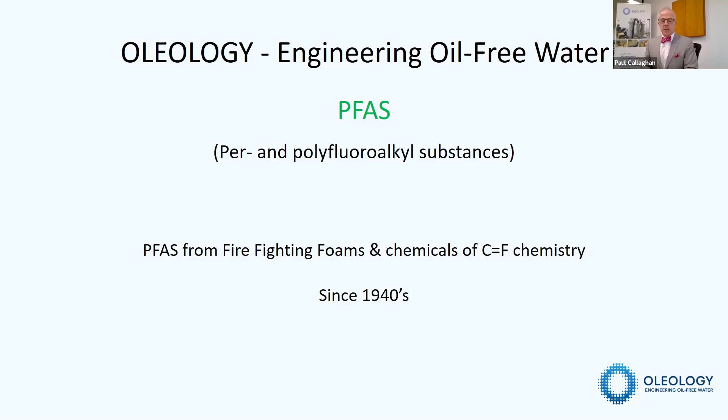Now, PFAS is per- and polyfluoroalkyl substances. Most people know PFAS as a result of reports regarding firefighting foams and the chemicals associated with them. And they're known for their particular chemistry, which has a double bond between the carbon and fluorine atoms. It's made its way into water, and we need to talk about that, the impacts on human life and the environment, but also how we overcome it.

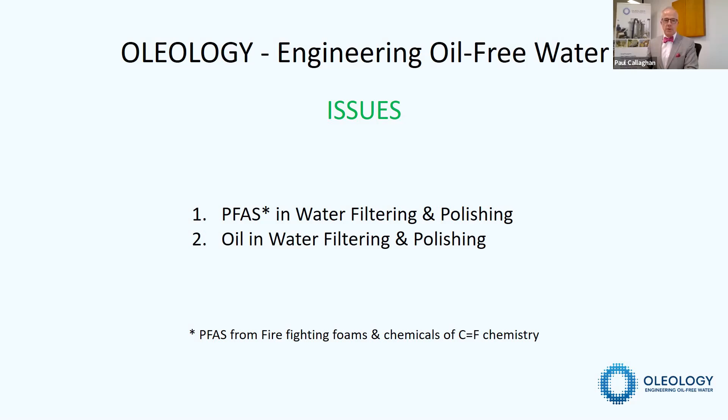And while we're talking about PFAS, it's not possible to consider how to treat PFAS if you don't also consider the oil in water and the ability to remove the oil in the water, the organics that are often associated with PFAS. It's not found in nature, it's purely man-made. It has serious health implications. It's linked to several cancers. Very disturbingly, it's an endocrine disruptor.

So that has an impact on humankind, but it also has a big impact on fish spawning and the fingerlings, basically the reproductive system, both in humans and in animals in nature. It's absorbed by ingestion, and the impact of the forever chemical, as it's termed, is in the order of 40 to 90 years. So roughly 2 to 4 generations before its half-life has been reached. Others break down and oxidize very quickly by comparison.

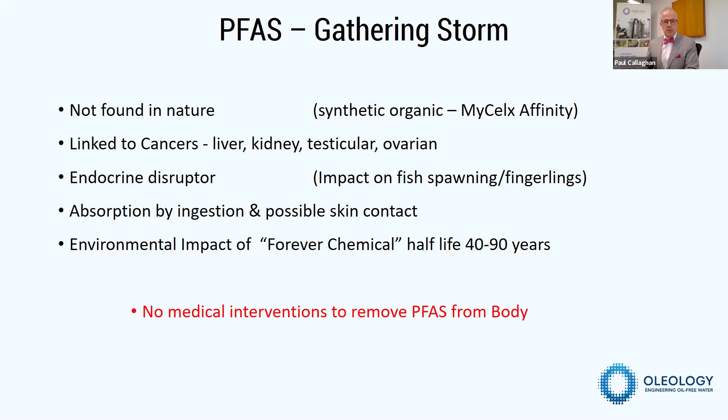Not only does it have a very long half-life in nature, in the environment and in our bodies, but there are no medical interventions able to remove PFAS from our bodies once it's been absorbed. The best and the only intervention is to stop the exposure. And that's what we're here to talk about today.

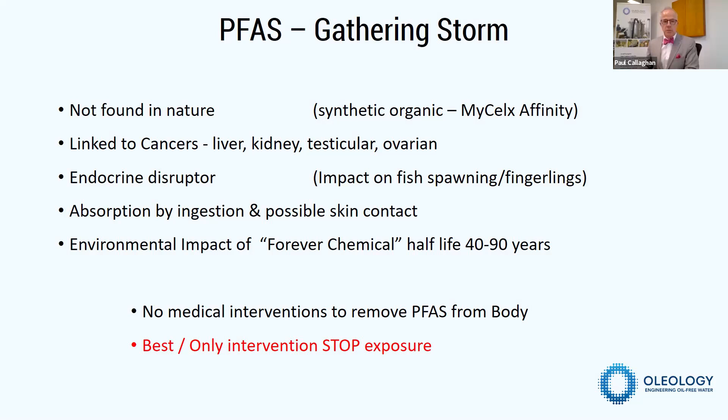In the oil and gas industry, mining, waste, rubbish and landfills, it's listed on the Stockholm Convention. Many of the countries from which you would be listening to this presentation will be a party to the Stockholm Convention, aimed at reducing environmental disruption as a result of contaminants. In Australia, it's part of the National Environmental Management Plan 2. In the US, there's legislation in 6 states that will be enacted in the middle of this year coming, that's 2021.

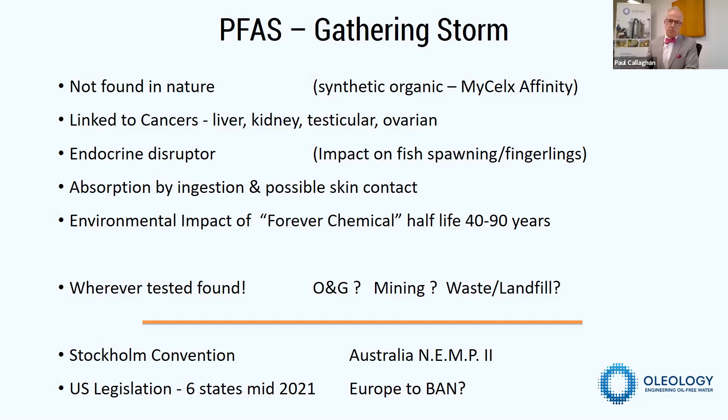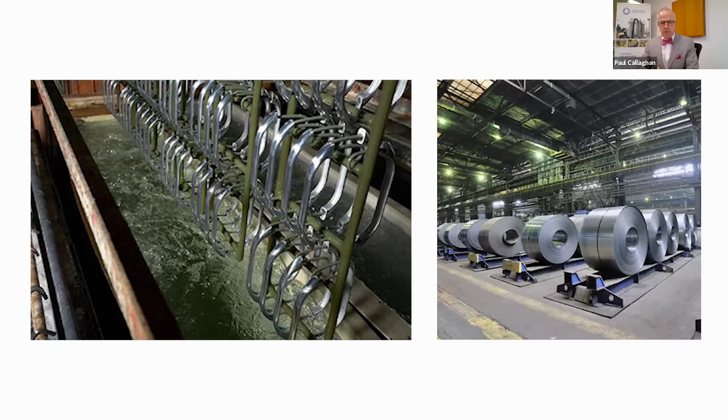And in European areas, they're looking to enact a complete ban on PFAS products, which is quite difficult because PFAS is found throughout a range of industrial applications and also very simple uses, such as cardboard linings and paper bags. It's used in waterproofing and stain guard protection. It's an active ingredient in pesticides. It's part of the process for manufacturing printed circuit boards and metal plating, and firefighting foams are prevalent and still in use around the world in many locations.

All of that finds its way down into the wastewater treatment plants, in industry, through the sewer system, into the wastewater treatment plants, which ultimately discharge into the river and to the ocean, finding their way into fish stocks, ultimately for ingestion by ourselves. Similarly, for waste, the PFAS leaches out. PFAS is highly soluble and it continues to leach into water for a long period of time. That may find its way into the soil. The groundwater then continues its progression towards the river and ocean, and again ends up in fish stocks.

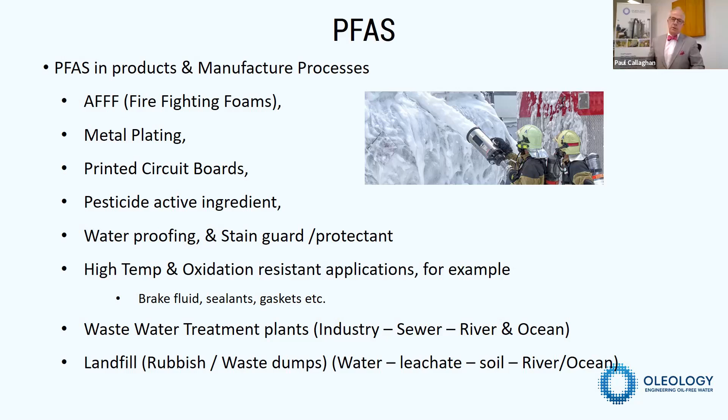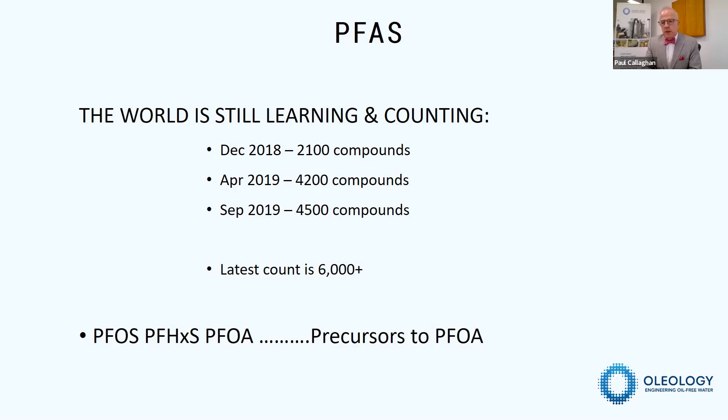PFAS is found with hydrocarbons. And if we look at the brief history of our development and where we started about 16 years ago in working with Airservices in their fire training grounds, the PFAS that we were really seeking to remove was as a result of the AFFF firefighting foam, AFFF being aqueous film-forming foams. In that particular instance, the aqueous film-forming foam was used in conjunction with jet fuel to form the basis of the fire.

Fire trainers, the firefighters, then as part of their training, quelled those fires with aqueous film-forming foam. All of that water, unburnt jet fuel, partially burnt jet fuel, and the AFFF foam made a highly emulsified mix of oily water that was chemically stable. So in order to treat that and make it safe for discharge to the environment, we had to achieve a discharge of oil in the water of less than 0.6 parts per million, or 600 parts per billion. That was the requirement back in 2004.

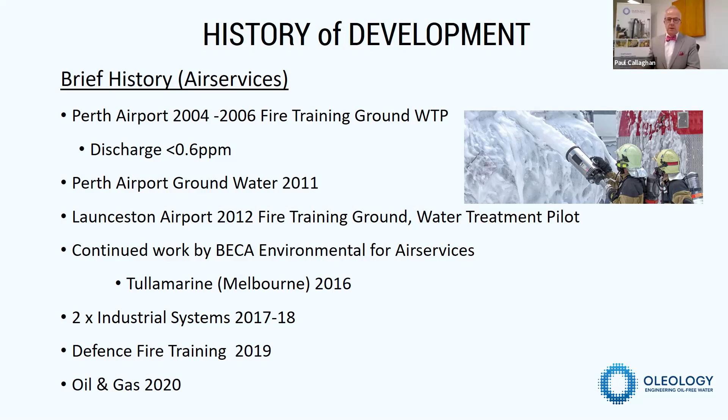Subsequent work in 2011 at the Perth airport, treating groundwater with PFAS impaction, showed that we were actually removing the PFAS, particularly the PFOS and the PFOA, on analysis of the water. This led to further work with Airservices at Launceston Airport in 2012, continued on through to 2016 at Tullamarine Airport in Melbourne, where independent work was done on our treatment system by BECA Environmental at the behest of Airservices to ensure the veracity of all of the work that had previously been done. That was proved, and that was discussed in Australian Parliament as part of the Senate's Estimates Committee hearing into methods.

To have a robust system, you need to be able to treat hydrocarbons, both in their free and emulsified form. And we do that with MyCelx. We're able to do it because MyCelx has got the smallest footprint, very small cost of operation. Importantly, with treating both hydrocarbons and PFAS in association with those hydrocarbons, we end up with a minimal volume of dry waste. The waste needs to be considered in any form of treatment for PFAS.

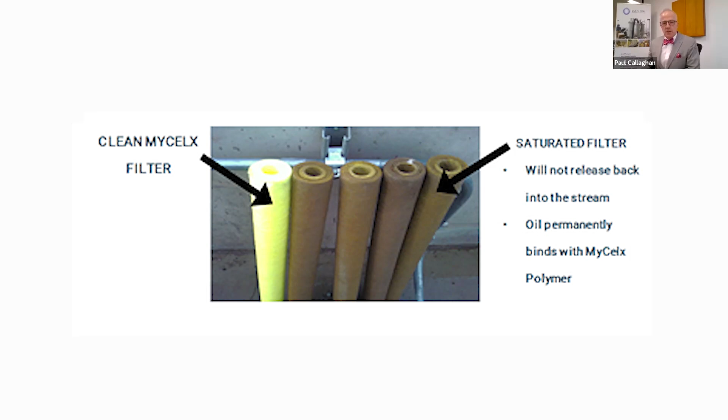Sludges are expensive to treat, difficult to move, and ultimately very costly. Backwashing of systems also produces further concentrated waste, which also requires costly treatment. The best and safest manner is a dry waste with the PFAS contained within it, which makes it environmentally safe. There's also, in our processes of treatment, no residual chemical, nor chemical dosing required. We have a fixed chemistry within our systems.

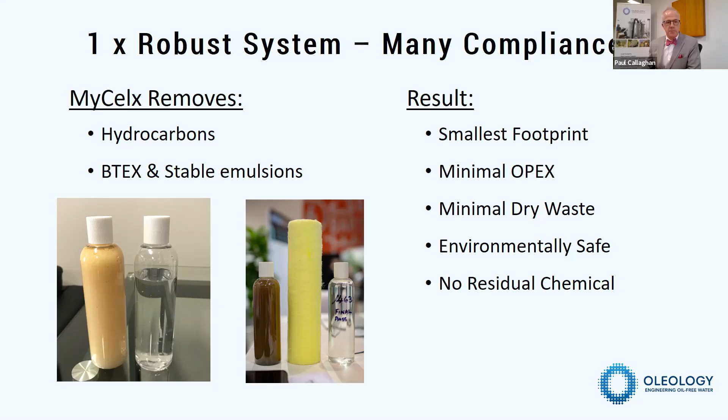All emulsions via cartridge filtering, which you can see in the second picture, and the cartridge is portrayed in the middle of that oily water mixture, and on the right hand side in each of those pictures shows the water after discharge having been treated by Oleology with the MyCelx treatment process. We're able to, from left to right, in decreasing size of oil droplet. Oil droplets of a 50 micron size are easy to separate out. As the oil droplet size decreases, it becomes increasingly more difficult for conventional equipment to remove that oil droplet. MyCelx spans the entire range.

We remove and recover oil in its larger forms down to about 5 micron droplet size. And that's in the primary stage, the first of the red arrows. The second stage is able to remove oil and oily emulsions at a very small droplet size, down to about 4 microns in size, depending upon its state. And the final stage is the filtering stage, which is able to remove oil droplets down to 0.09 droplet size. We're getting into the heavily emulsified oil-soluble components, and it's in this stage and just beyond there that we begin the removal of the PFAS.

It's important to understand that PFAS is at the highly soluble end, and unless you remove the other contaminants before it, your PFAS polishing stage, and there are a few conventional types of PFAS removal, such as granular activated carbon and ion exchange. Now, we've been involved in a number of projects where we've been approached by companies that have activated carbon and ion exchange resin that suffer premature breakdown and failure of the system that is leading to early breakthrough of PFAS because they have oily emulsions finding their way into their treatment system and they haven't been able to remove them by effective and robust pre-filtration.

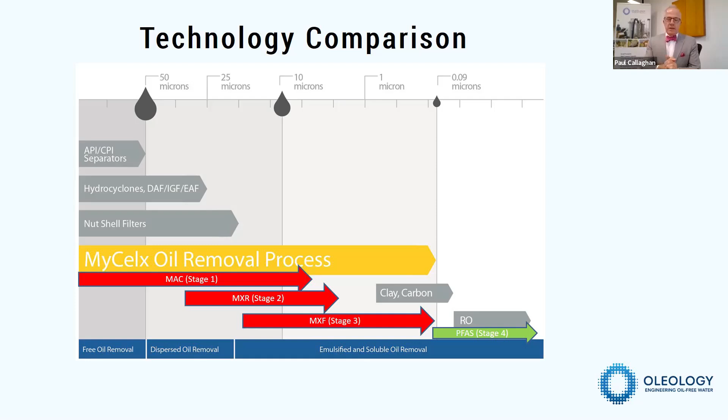We consider that as an onion, progressively starting at the outer layers and removing the greater mass of oily waste or organics and progressively shrinking down the mass of production of contaminant until you get to the core of the onion, the very small part. And that small part is where we are targeting the PFAS reduction. So remove the outer layers, it's much easier to get to the inner targeted layer.

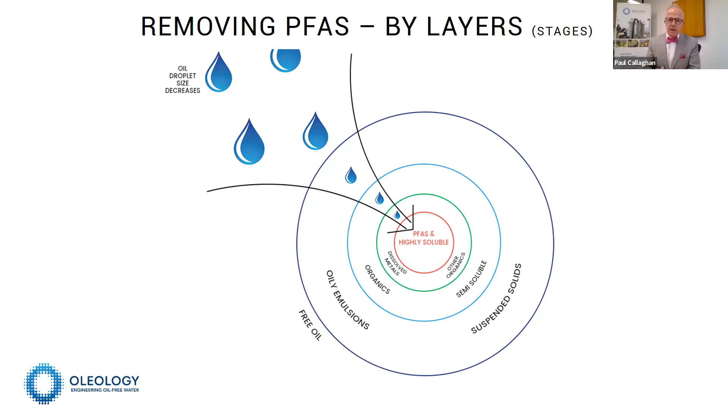In equipment on the ground, well, we put that into two 20-foot containers. So imagine two 20-foot containers sitting side by side, a footprint of approximately 6 meters long by 2.5 meters wide, so approximately 30 square meters. Fairly small footprint for something that can treat 8 liters per second, about 800,000 liters per day, and achieve a discharge that's below detectable levels when measured in parts per trillion.

We have one pump, so it's very low energy. The systems are automated and have remote monitoring to infer the performance of the equipment. The small footprint I've already outlined, there's minimal service associated with it. There's no chemistry, there's no chemicals added to the process, and there's no chemistry that remains in the water from the process. So again, we reduce the risk of future liability as we do not add any chemical to the water. Our chemistry is fixed, it's non-leaching and non-toxic.

MyCelx is hydrophobic, that is, it repels water. So when we remove the cartridges or the filtering media, it's dry. We're able to store those in small containers that are sealed and then sent for thermal oxidation. So we have a total treatment.

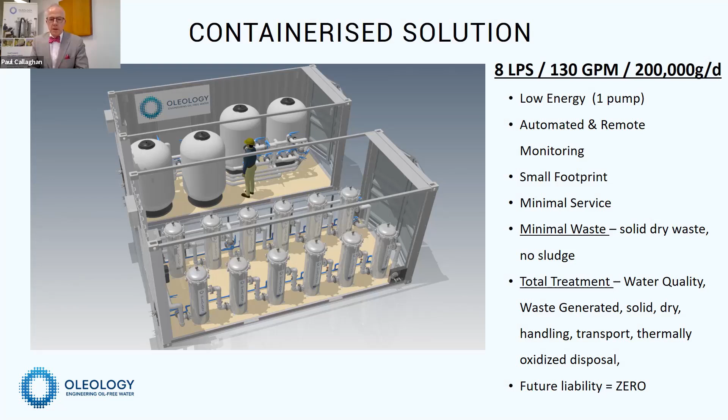We achieve a high in terms of footprint. The OLEOLOGY with the MyCelx technology wins hands down on that. Far smaller than granular activated carbon and far smaller than ion exchange systems. The volume of flow relative to the size, MyCelx is about a 20th of the volume of media that's required to achieve the flow rate. MyCelx again is extremely good.

There's limitations in GAC in achieving the short chain reductions of PFAS. Ion exchange, if selectively and correctly selected with enough of the contact time, can achieve those levels. It's short and long chain hydrocarbons as well as short and long chain PFAS. So across the board and across all PFAS contaminants. And that's something that we really haven't spoken about.

Of the 6,600 known, and that number's probably grown by now, of PFAS contaminants, we use TOPA testing, that's total oxidizable precursor assays, to ensure the total of those known and unknown analytes that can't necessarily be assessed by commercial laboratories at this point in time. We do those TOPA tests to ensure that that total range of carbon fluorine products are removed by the MyCelx process. So we have compared to sludges and other wet wastes.

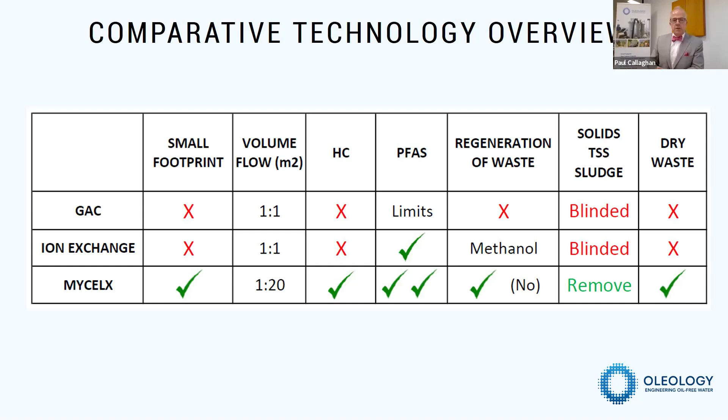And that's removing the hydrocarbons, the emulsions that are created as a result of surfactants formed from the AFFF firefighting foam, removing the PFAS from that water to be treated, and doing that to non-detectable levels here in Australia at 700 cubic meters per day. It's a much smaller system. Lower cost of setup, lower cost of operation, lower cost of waste.

It makes it affordable for industry to enact, which is to make profit for the shareholder, and the requirements of environmental protection associations which want to protect the environment. It's bridging the gap between the two. The technology's here and available now. That's the basis of the system of removal.